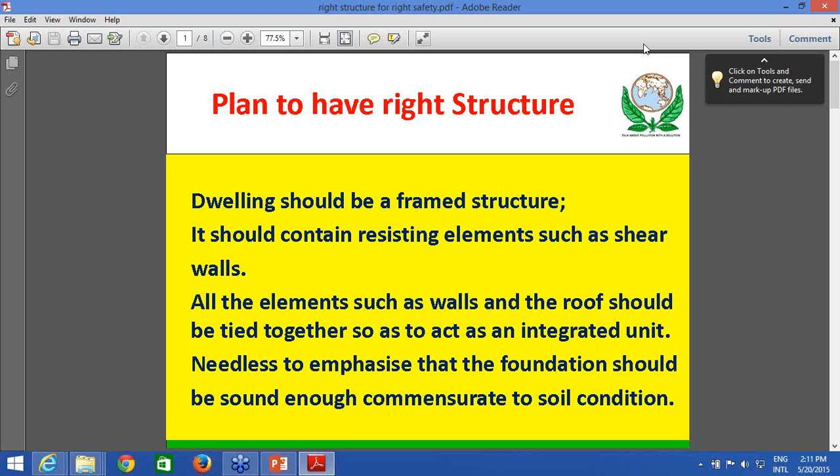The point here is, a structure is built for safety factors, 1:3, 1:4. These are all safety factors on the design aspect, but when an impact load comes on the structure due to earthquake, these safety factors are availed to the brim. So in an earthquake prone structure, the safety factors have to be enlarged, and the soundness of the execution should be more diligent.

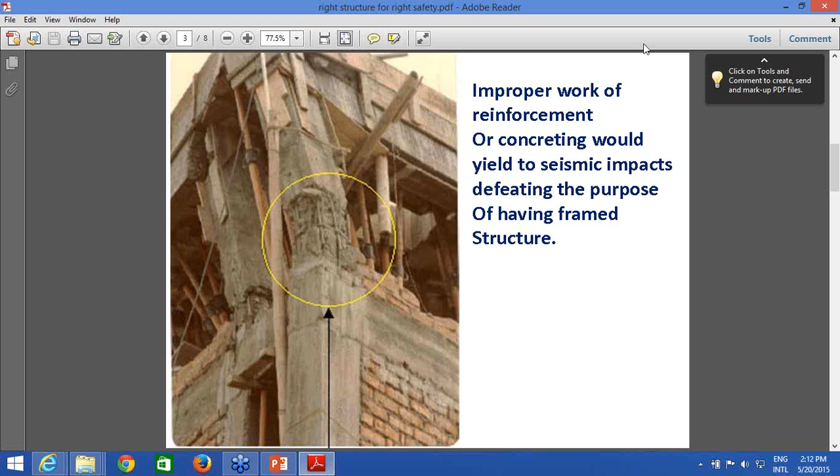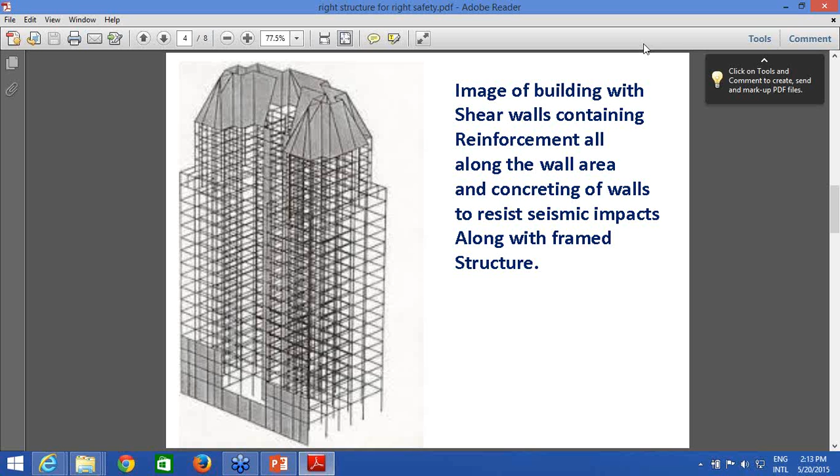Next, this is how a building looks in an earthquake prone area. There are no walls; the walls are also designed with reinforcement. So whenever a slab and beam is going to be cast, first the walls are cast and then the beam and slab are cast, so that the whole thing becomes an integral part. Next. Here is a shear wall with reinforcement, and it can resist the seismic impacts comfortably.

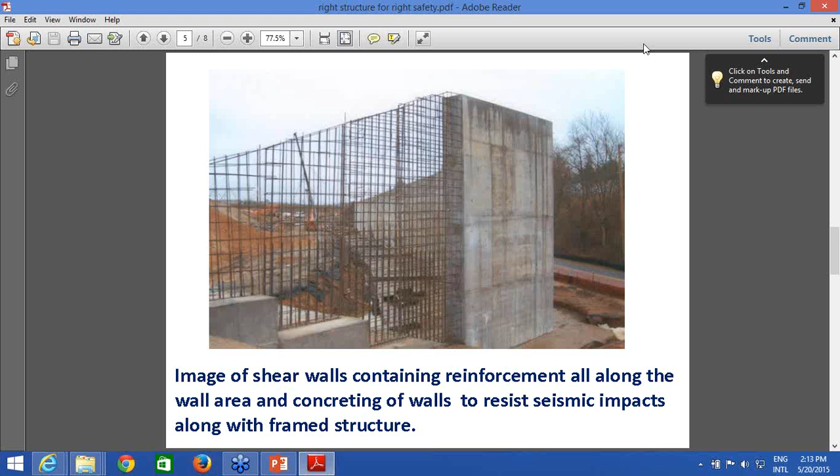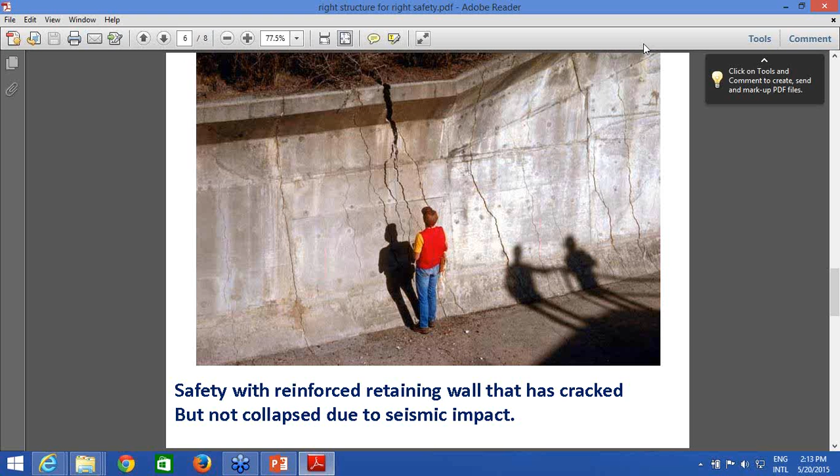Here is another retaining wall. Because it is a reinforced wall, despite the earthquake, the wall has cracked, but it has not collapsed. So this is the comfort of having a shear wall with reinforcement. And we wish there should not be collapse and casualties. But if an earthquake happens, the debris can be recycled in order to execute structures, which is what we are now offering to the Nepal region.

We want to say that future buildings should have shear walls. For constructing shear walls, you need a lot of aggregate. The aggregate need not be taken from natural sources. You can use the debris and recycle it as recycled aggregate. So this is how things can be integrated in order to do something for earthquake-prone regions. Now I welcome questions from the spectators.

Before we start, there are a couple of queries to take this discussion a little forward. If the rubble could be converted into aggregates, why haven't we done it so far, and what does it require? When you say that the rubble can be reused, what does that mean? Basically, the rubble consists of two constituents. One is brick, the other is concrete.

Brick as aggregate is a weak product. More so, if the bricks are not properly baked, they are not a good aggregate. Then you have to overcome the weakness of the brick by having a good concrete. Today, we have opportunities to develop concretes with a strength as high as 800, 900 kg per square centimeter, as against the 200, 250 kg concrete we normally put in conventional buildings. So by increasing the concrete strength, you can compensate the weakness of brick. This has opened up the opportunity to use brick also as an aggregate.

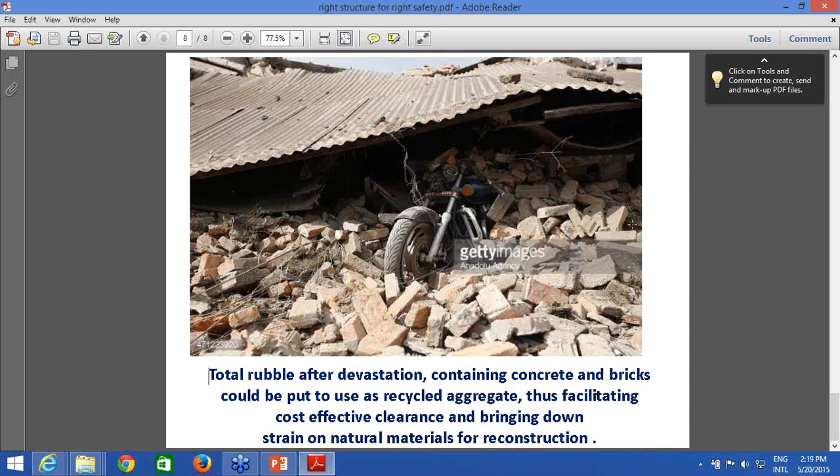Our first question comes from Sujata Shankaran: how to ensure that this can be implemented in gated communities. I think what Sujata means is, when we are talking about how to ensure your safety, earthquake resistance, if you're living in a gated community, in community living, how will the individual ensure it? What is the onus on the individual, or does it have to be at the community level? And if it is at the community level, what can be done?

I think more or less what she's asking is, is retrofitting possible? What are the steps? Maybe assessment, maybe engagement at the community level. What can be done? When it is a community, you have to take the whole community into confidence in order to progress with any repair or retrofitting. How do you know that you need retrofitting of your structure? What is retrofitting, and how do you assess for retrofitting?

You see, till now we have been accepting whatever the builder says, whatever engineers say. Because now earthquakes are frequently coming and their intensity is increasing, a good number of structural engineers have to develop themselves into earthquake resistant structural engineers. They have to understand the codes, digest the recommendations, and come out with manuals, check parameters, check mechanisms to analyze the existing structures.

So such people can help persons like Sujata. They can come to your place, analyze your structure on various parameters, and recommend to you, first of all, whether it is safe or not. If it is not safe, what type of retrofitting or strengthening mechanisms have to be adopted in order to make the structure relatively safer.